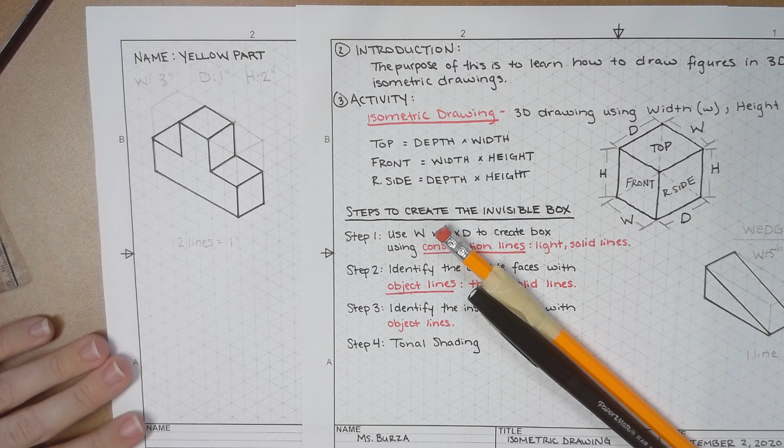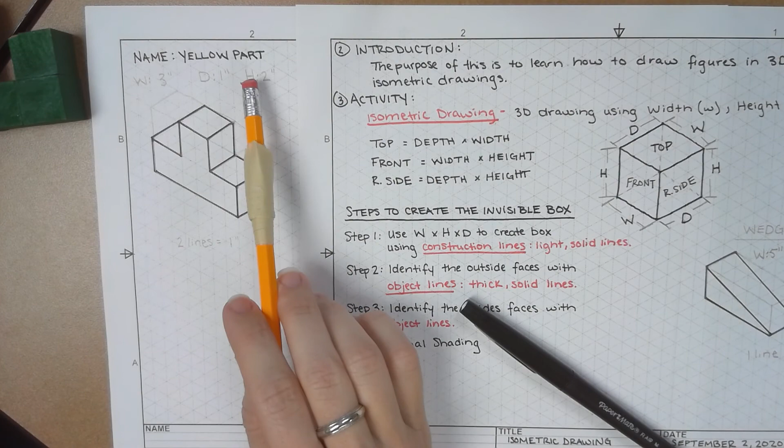This is video 6 of your isometric drawings. So just as a review from video 5, you do want to go in and identify your object lines with your pen and your straight edge. So if you did not identify where your object lines are in your yellow part, please make sure that you went back and are doing that.

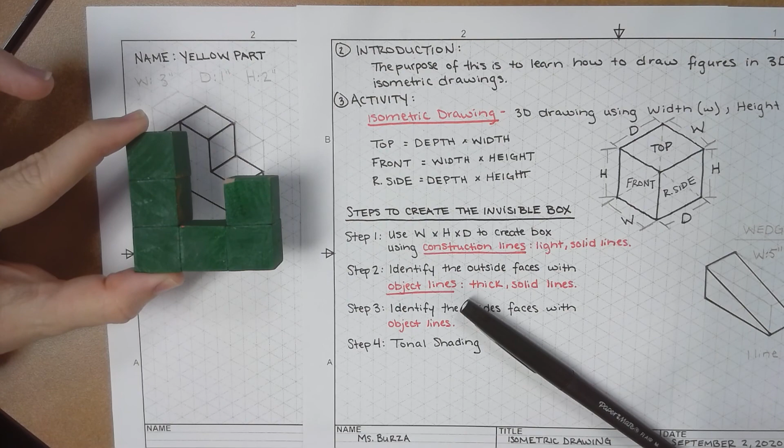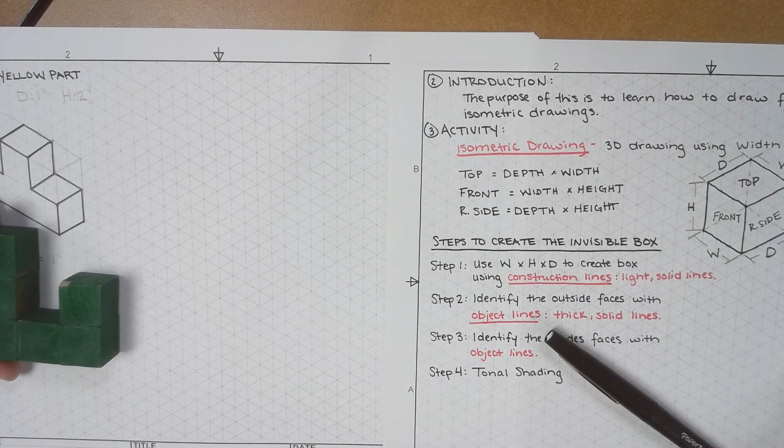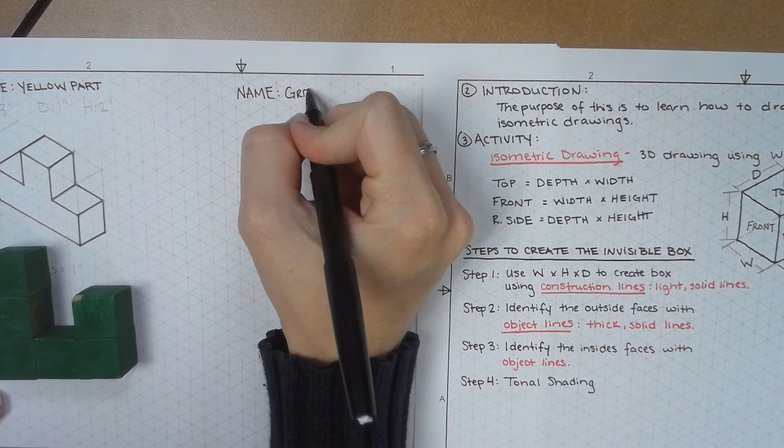The next figure that I would like to spend some time on and complete an isometric drawing for is going to be our green part. All right. So first things first, we're going to label. So I'm going to move my sheet over. I'm going to do them right next to each other so that I don't run out of room. All right. And what I want to go ahead and do is, again, just give it a name. Keep our notes nice and organized. I'm going to be consistent, and I'm just going to call it green part.

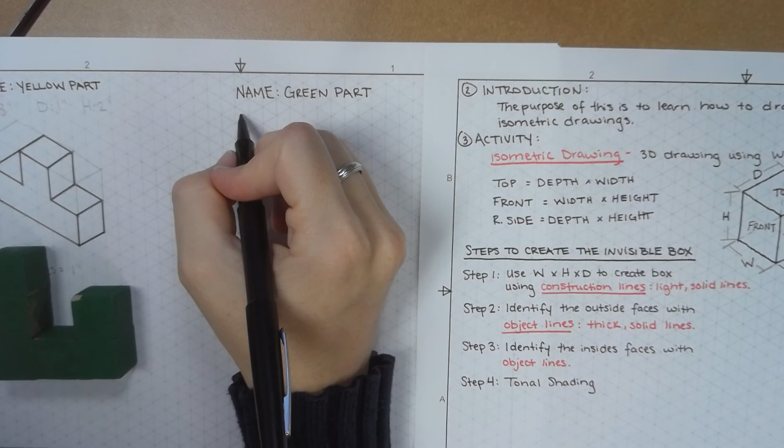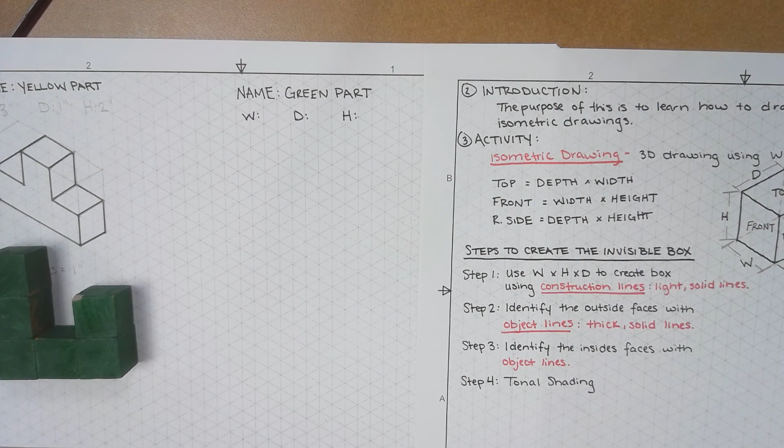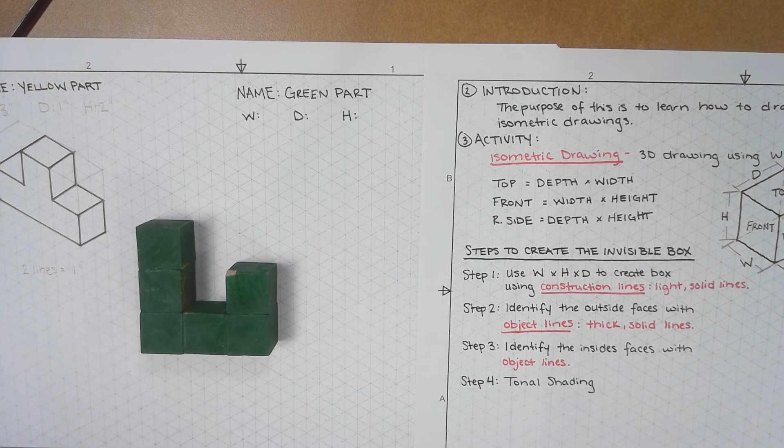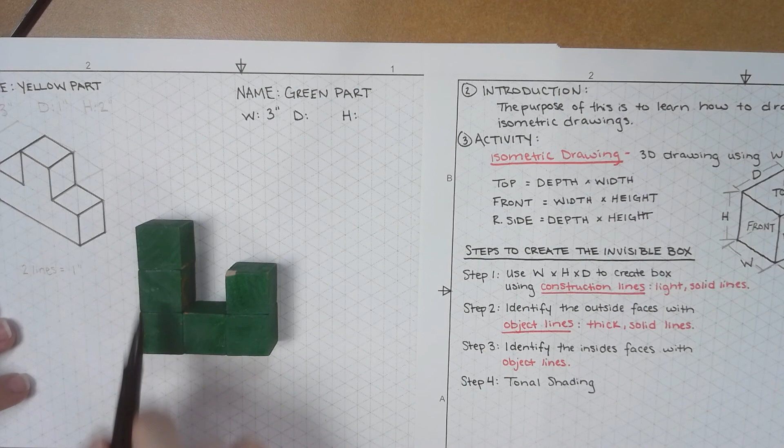All right. And just like we have been doing, we need to identify our overall width, our overall depth, and our overall height. And I'm just going to do these in pen just so you can see them a little bit better. The pencil is, I know, hard to see on the document camera. I apologize. All right, so this is our front view as a review from our orthographic drawings. I'm going to take a look at the front view because the front view has the width and the height dimension. So the width dimension of our green part is going to be 3 inches. And the height dimension is also going to be 3 inches.

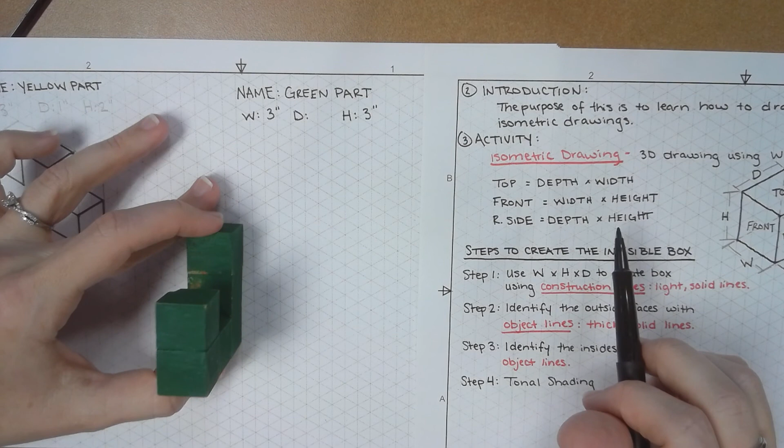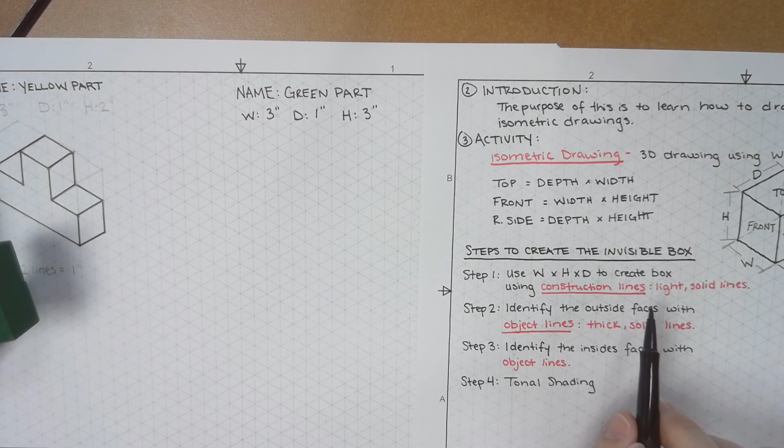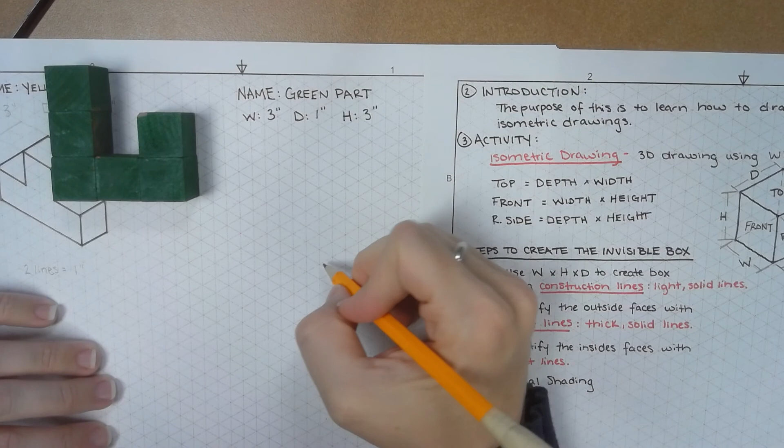The depth dimension can be found in the top view or the right side view. I'm going to flip it to the right side view, and the depth, how deep that object is, is going to be 1 inch because it is 1 cube. So now that we've identified our overall width, height, and depth, we're going to create our invisible box, again using construction lines. So I'm going to leave my part right there. I'm going to grab my pencil, and I'm going to create this invisible box. So again, you want to make sure that you give yourself enough room. I'm going to make my starting point right there.

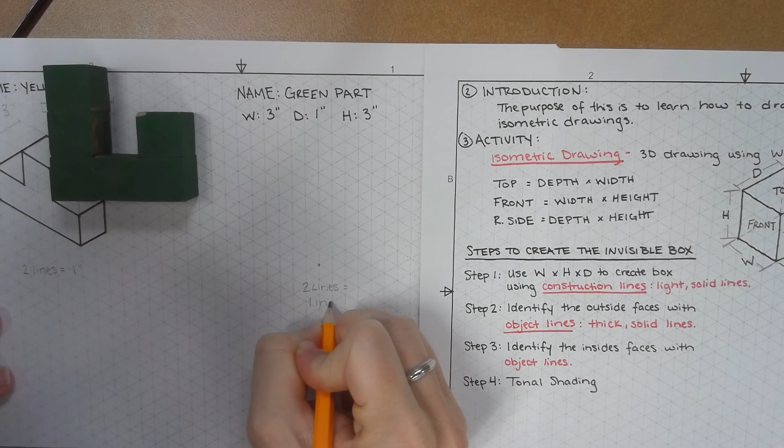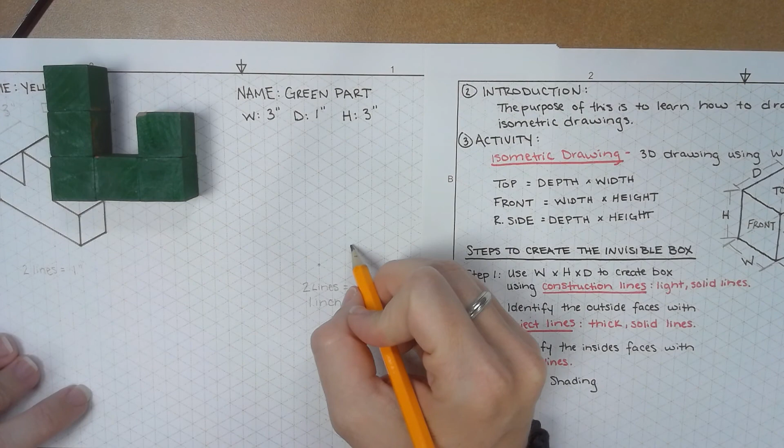And just like we did for our yellow part, I want to make sure that we write our scale down. So for every 2 lines that we have on our graph paper, I'm going to say that that equals 1 inch for our cube dimensions. All right, so that's our scale. So again, from this starting point, we're going to go back and to the right. Where am I getting that from? Right here. So this is our starting point. Back and to the right is always going to be your depth. To the back and left is going to always be your width.

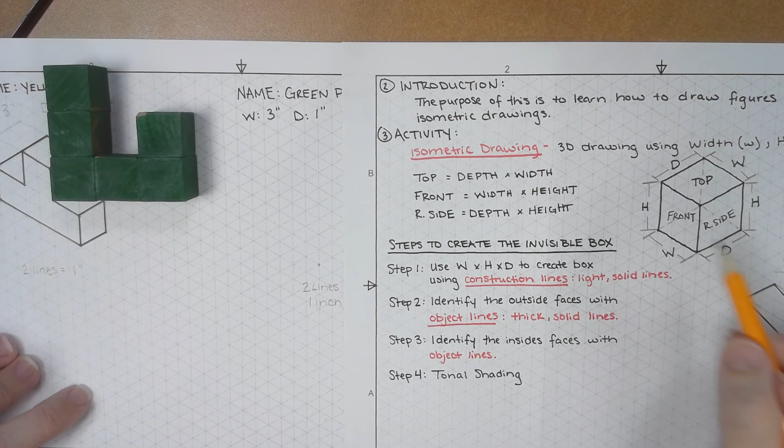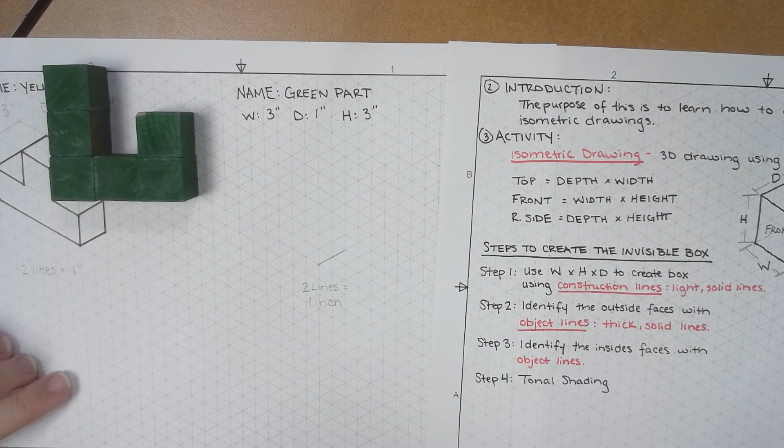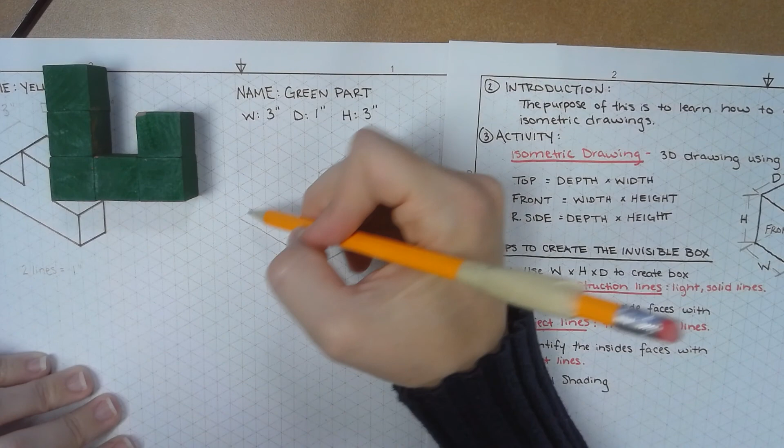Okay. So my depth is going to be 1 inch, so I'm going to come back to the right 2 lines per our scale, and our width is going to be 3, so I'm going to come back 1, 2, 3, 4, 5, 6 lines for our width. And again, I'm going a little bit heavier with my pencil than you need to be, just so that you can see it on the document camera. And then our overall height is going to be 3 inches, so I'm going to come up 2, 4, 6 for my height. And then I'm just going to finish off my right side view. And then I'm going to come up 1, 2, 3, 4, 5, 6. And I didn't go far enough down.

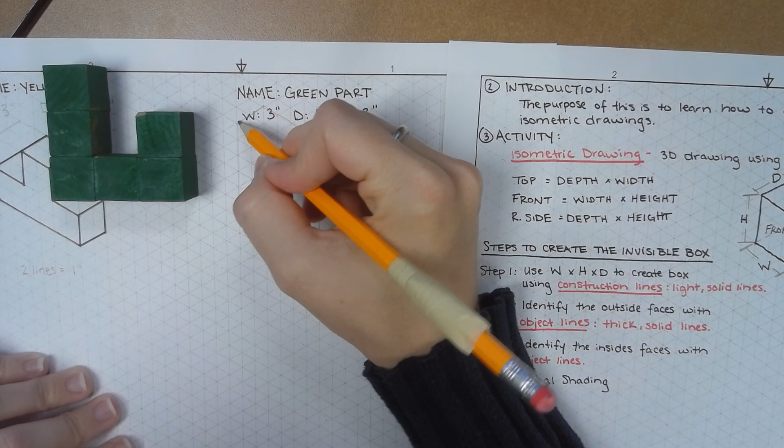All right, so my invisible box is going to kind of take up a little bit of my green part dimensions. It's not the end of the world, but again, make sure that you're giving yourself enough space. Lesson learned for me.

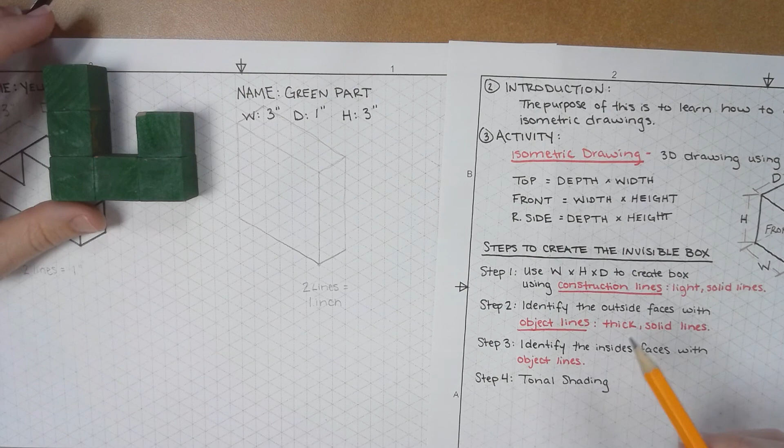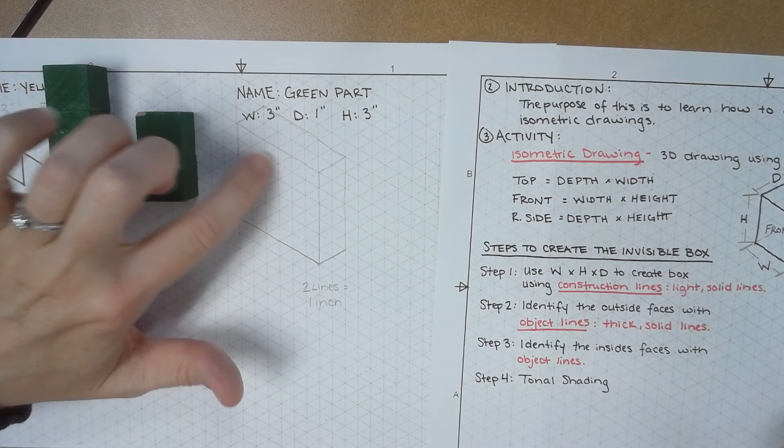All right, so step number 2 is you're going to identify the outside faces with object lines. So what I like to do, and this is a personal preference, is I like to draw out my front face in my front view. All right. So I know that I'm going to come in, and I'm starting from here, and I'm going to come in 1 unit,

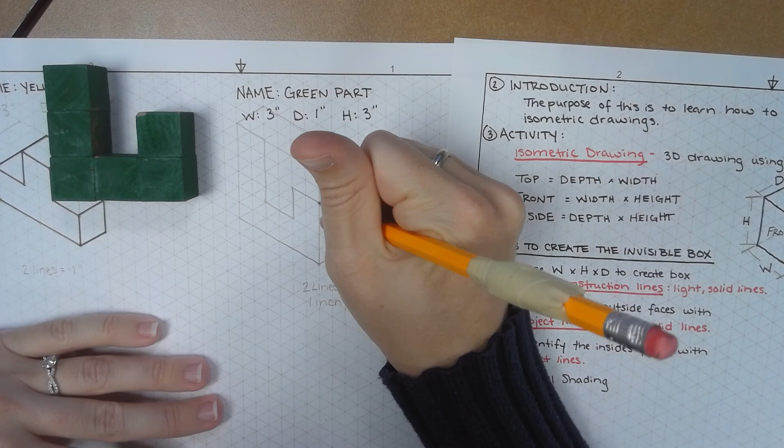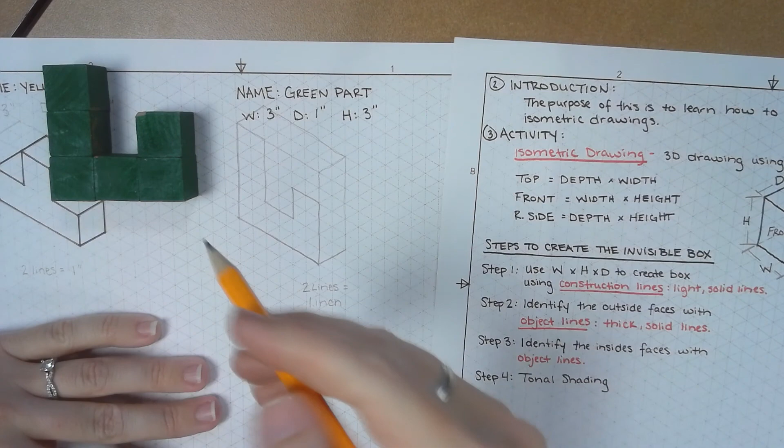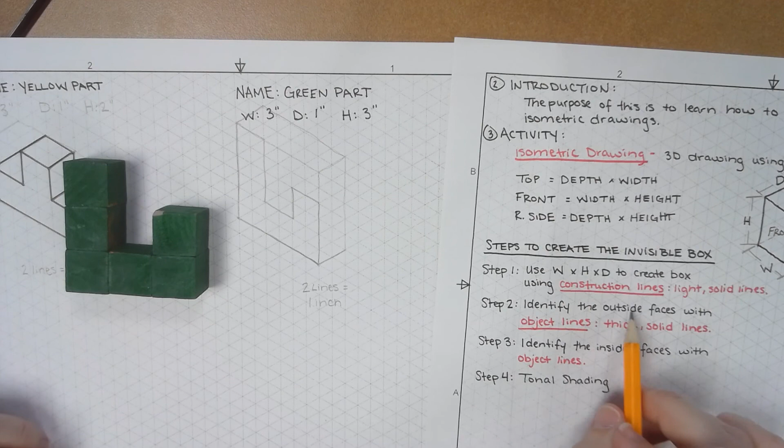and then I'm going to come down 2 units, I'm going to come over 1 unit, and I'm going to come up 1 unit, I'm going to come over 1 unit, and down. My overall height needs to be darkened with an object line. And there we go. So I have my front face of my part drawn out on my box. And the reason I did that is because they're all outside faces or all outside surfaces.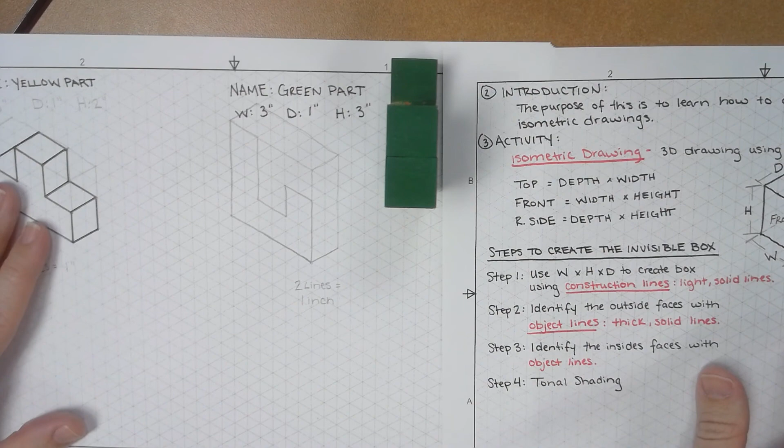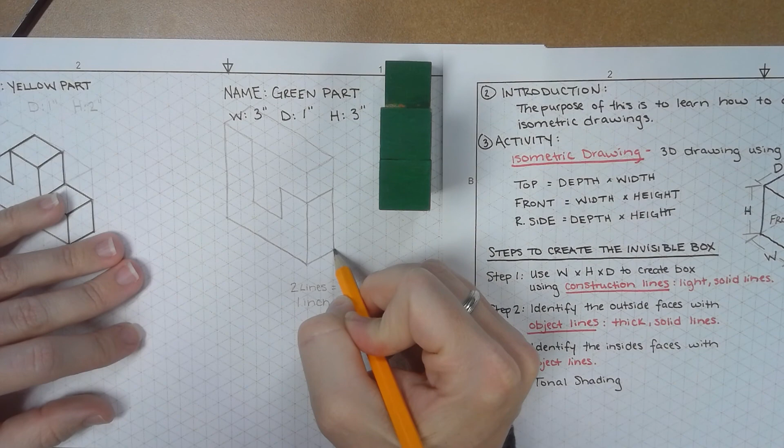Now if I turn it, make sure you can see it. Now if I turn it to my right side view, I can see these two faces. So I'm going to put that depth line back, and I'm going to come down there. All right, and this face I can also see, but this face is actually an inside face. So that'll come in step 3.

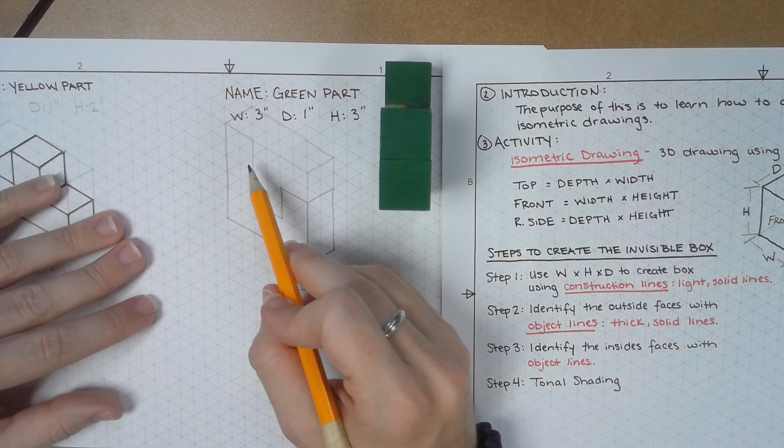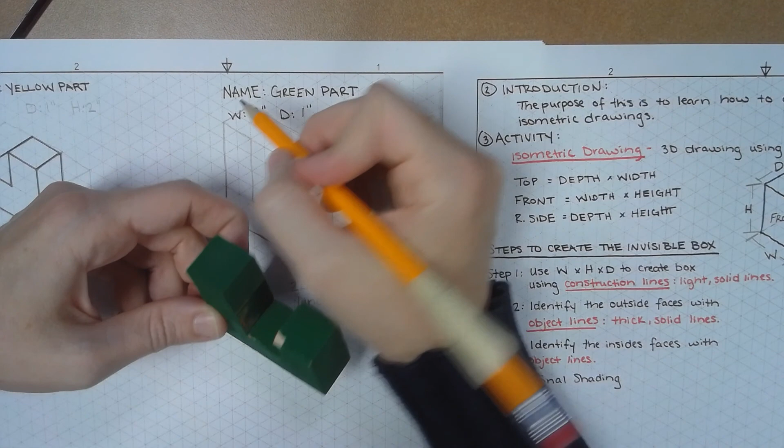What I can see, so my part's gonna, oops, you can't see it, sorry. So my part's gonna look like this, right? But what I can see is this edge right here in my drawing. So I'm going to identify that with an object line right there. And what I also can see is this face right here is an outside face. So I'm going to draw that.

And this is also an outside face touching the back half of my box. And then we also have this edge of 2 units coming straight down. So 1, 2 units. Okay.

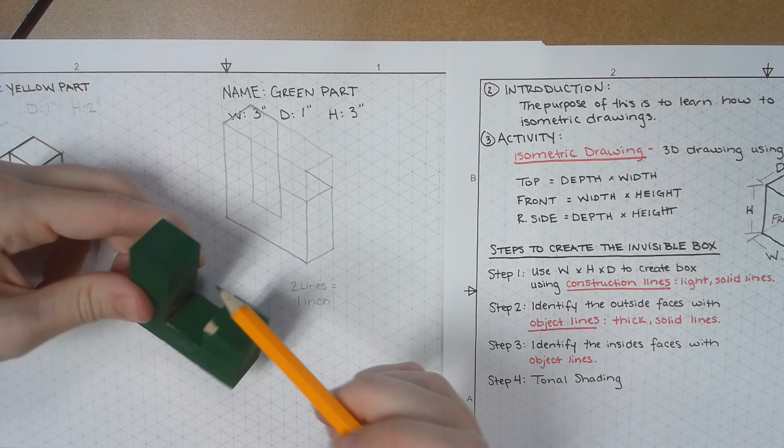Now what we need to do is identify all of the inside faces. So I'm missing, if you take a look at this, sorry, I'm trying to put it at an angle that makes sense to all of you looking at the document camera. So this is an inside face, it's not touching the outside of our box. So we need to add that.

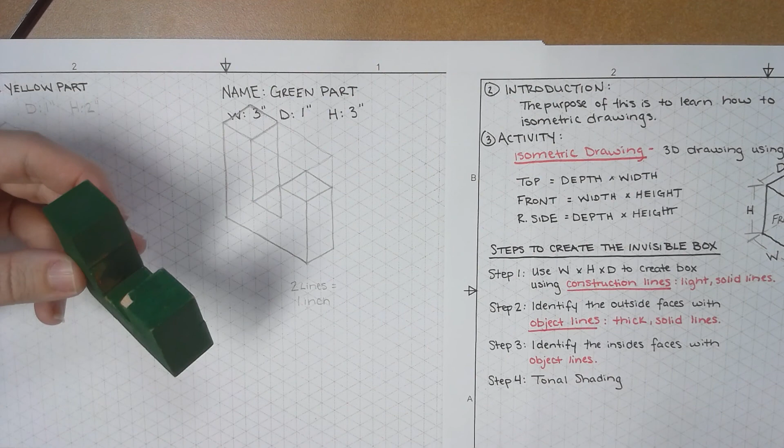We need to add this inside face right here, that edge right there. And then we are also missing this edge right here. All right, so that is what our green part looks like as an isometric drawing.

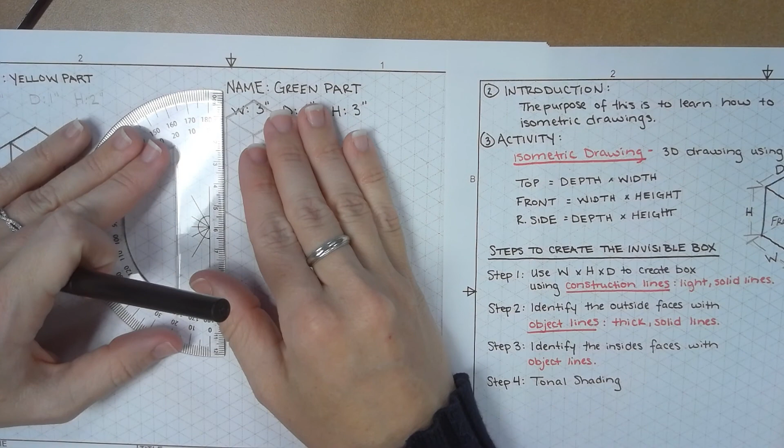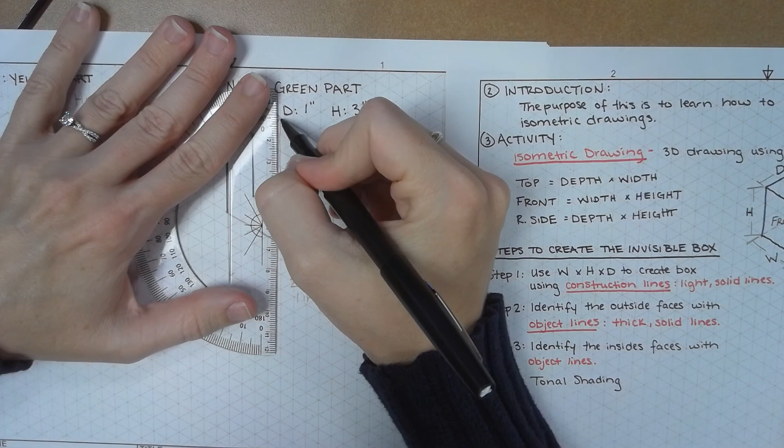The next thing that we need to make sure that we are doing is coming back in with our pen and our straight edge, and we are tracing over our object lines to very clearly define our object shape.

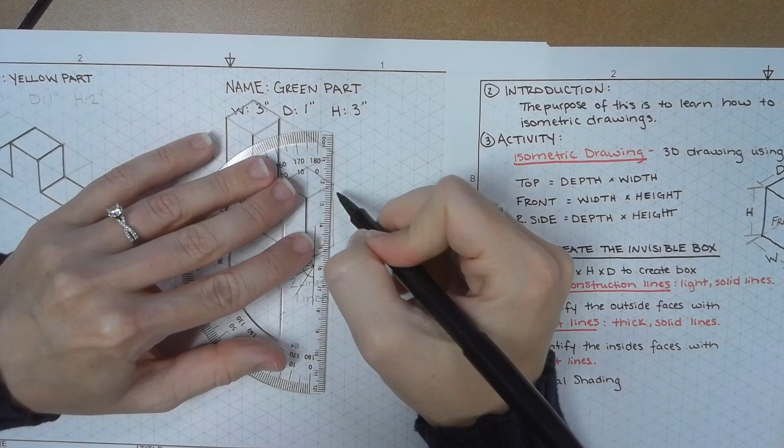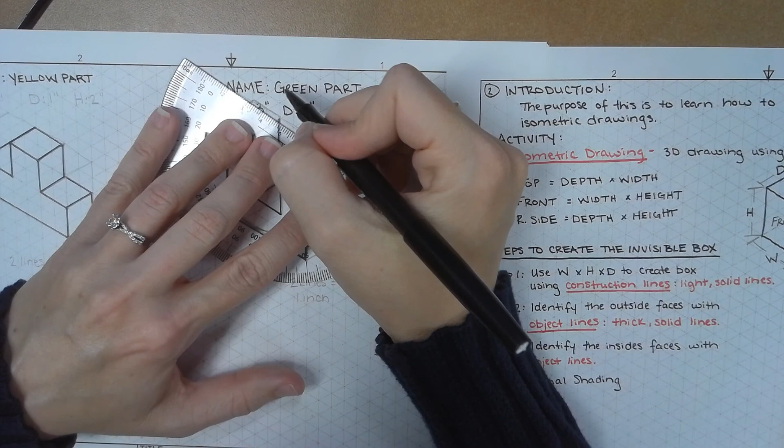And again, I would like you to leave your construction lines in your drawing so that I can see kind of the work and the thought process behind your drawings. That way, if you are missing something or something is where it's not supposed to be, I can better help explain why things are the way they are and help you make any corrections that are needed.

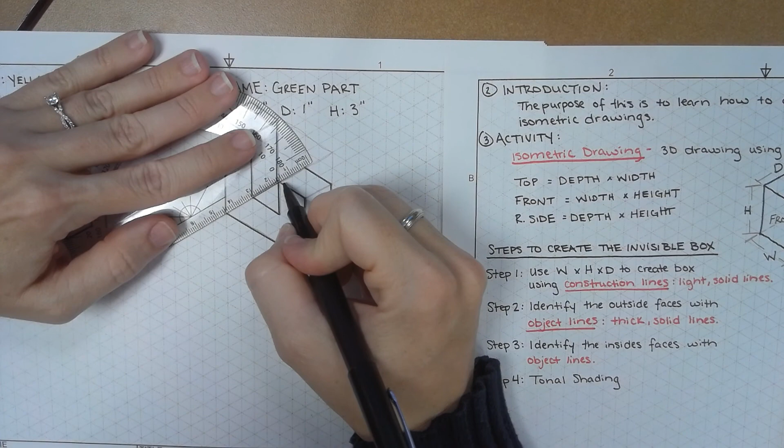All right, so I'm just coming in and I'm going over, again, my object lines to clearly define my object. And please make sure that you are using a straight edge while doing this. And I would like you to keep your construction lines.

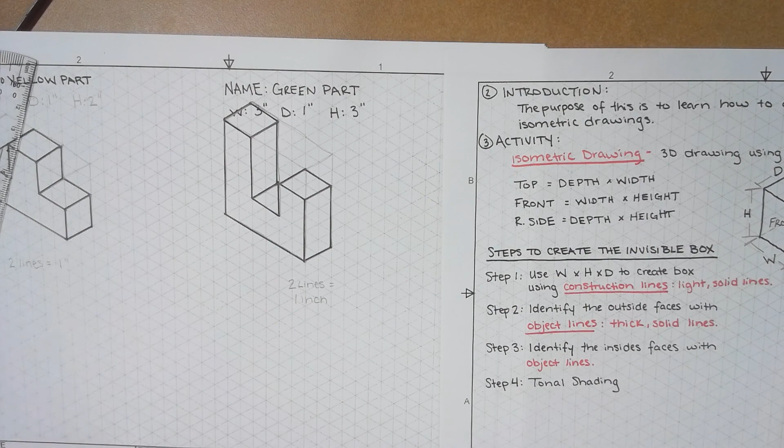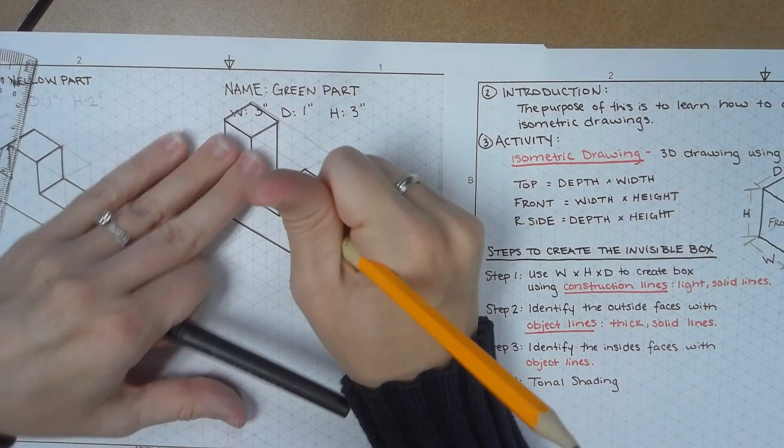Some of these object lines I didn't do a very good job of tracing over, so I just want to erase a couple of those. There we go. But I do want you to keep these construction lines that you use to create the invisible box. That is how you make your green part.